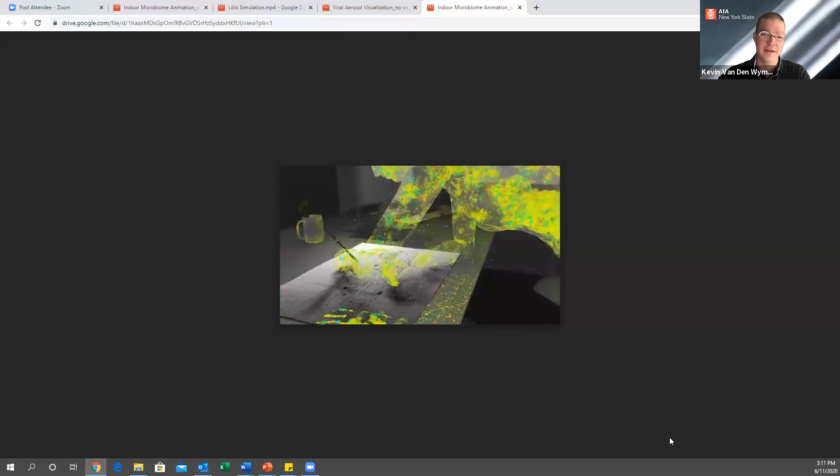We have microbial hitchhikers in our race for the sterile space, and we've lost some diversity in our human exposure as we disconnect from outdoor ecosystems. Buildings house trillions of microorganisms interacting with each other and with humans. Understanding the indoor microbiome opens a design opportunity to support human health in really unprecedented ways. And we knew that before COVID-19, and it's now in everybody's worldview and understanding.

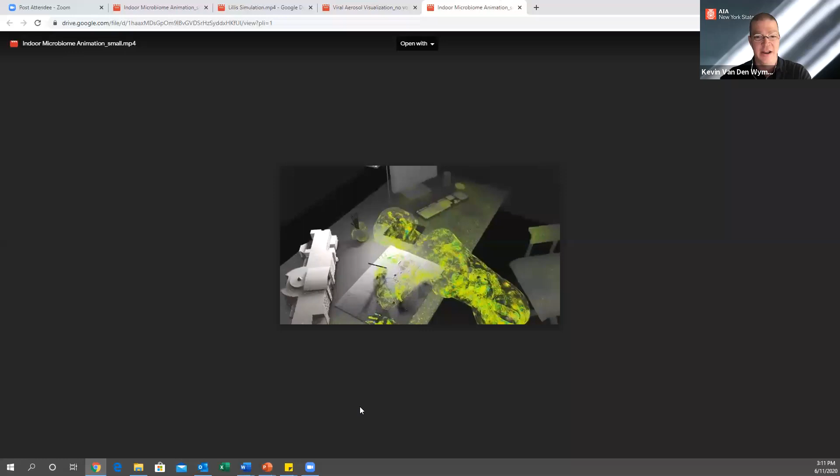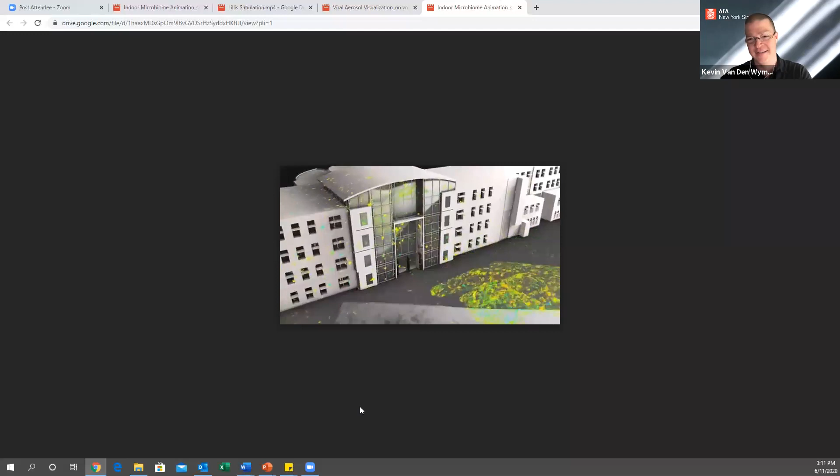We've learned how building design and operations and human behavior shapes the indoor microbiome. And as Churchill said, something like, we shape our building microbiomes and thereafter they shape us. I think that's what he said. We know that exposure to sunlight, access to fresh air through operable windows, and material choices all impact the indoor microbial landscape, and human exposure to both beneficial as well as potentially pathogenic microbes.

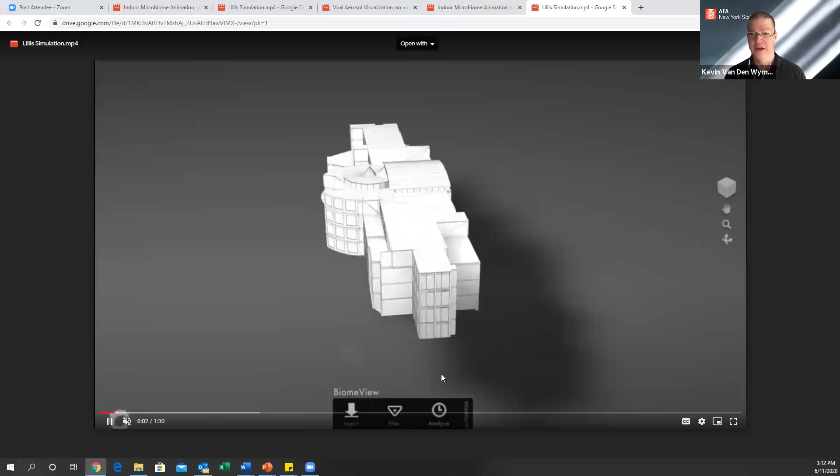Next slide. In 2011, we took this idea of studying indoor microbiology to the Lillis Business Complex, and we were interested in this building for several reasons. There's a diversity of space types and activities that occur in this building, but also our energy lab. This was before I joined University of Oregon, but our energy lab had done consultation on this to try to reduce climate impact.

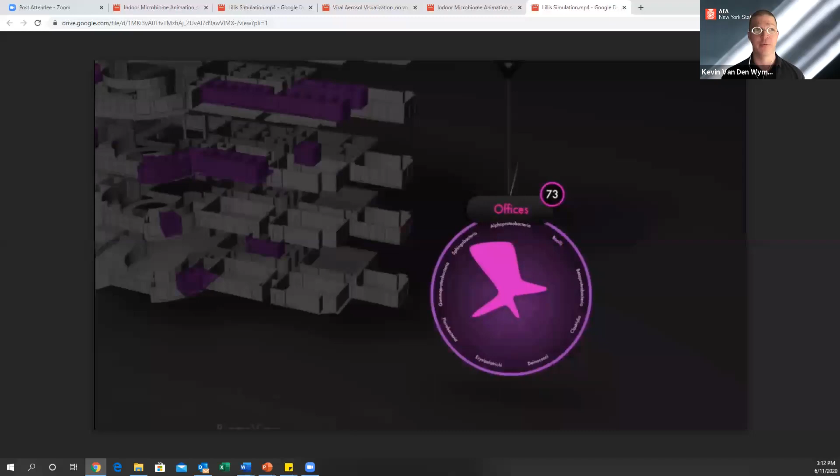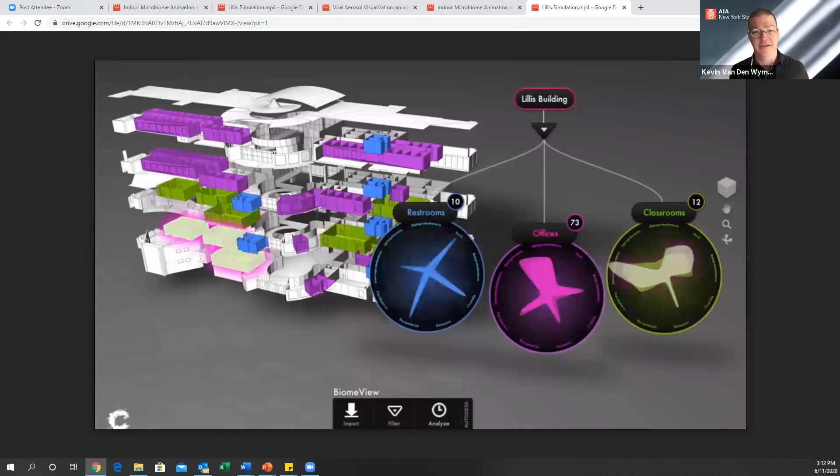And you know, for 2001, when this was constructed, it achieved an EUI of less than 40 for a large higher ed building. That was pretty exciting. But here we find the synergy between health and energy, coming back to study this building and some of those energy efficiency strategies with regards to the indoor microbial ecology.

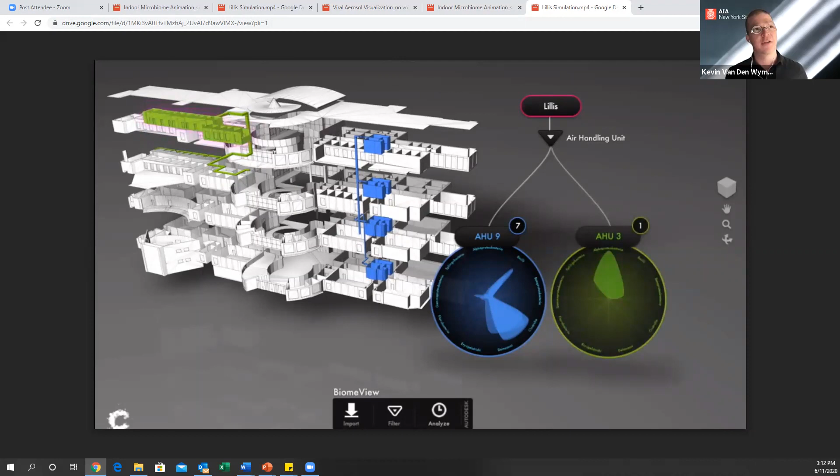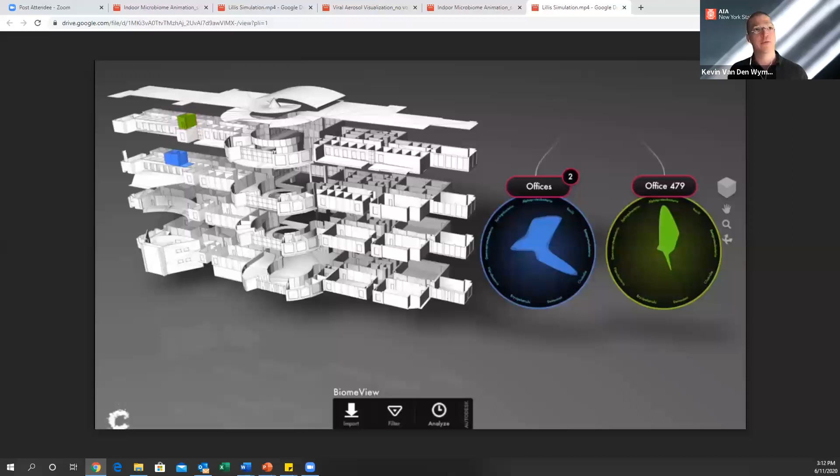So you can see that these plots are actually kind of phylogenetic tree plots showing different indoor microbial structures with different room types and different air handlers, and some of that predicated by the activity. Here you can see different offices on different air handlers have different microbial signatures.

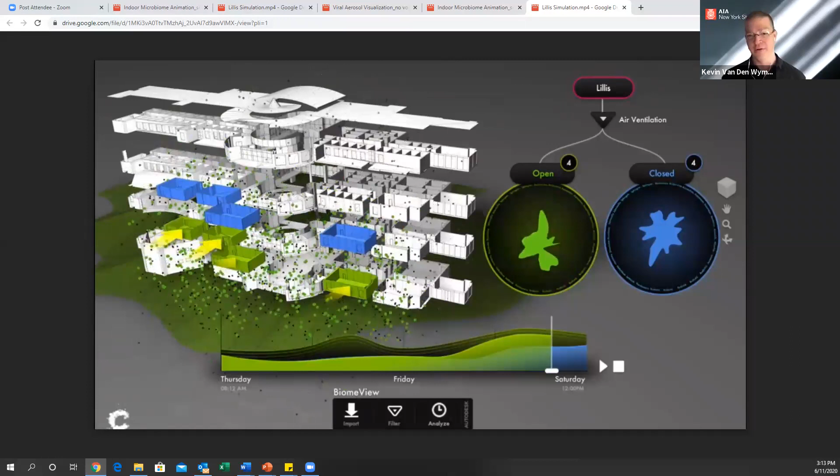And what you're seeing here is a microcosm kind of study where we did 3 days of operation, where we had some rooms that were mechanically ventilated and some rooms that were passively ventilated with the natural ventilation and night flush cooling strategy. And really what we were able to determine is that there was a reduced abundance of potential pathogens in the spaces that had natural ventilation.

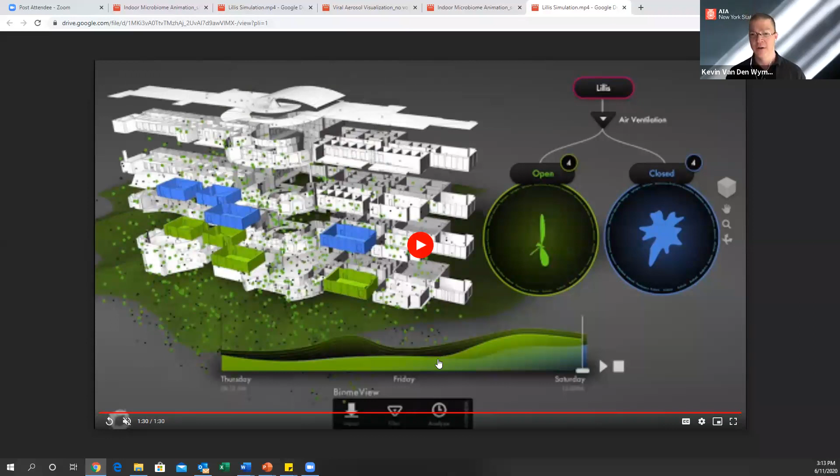We don't know the mechanistic explanation precisely, but it could have to do with the solution to pollution is dilution, or it could have to do with the lack of filtration and intentionally introducing a more diverse microbial ecosystem from the outdoors. Next slide.

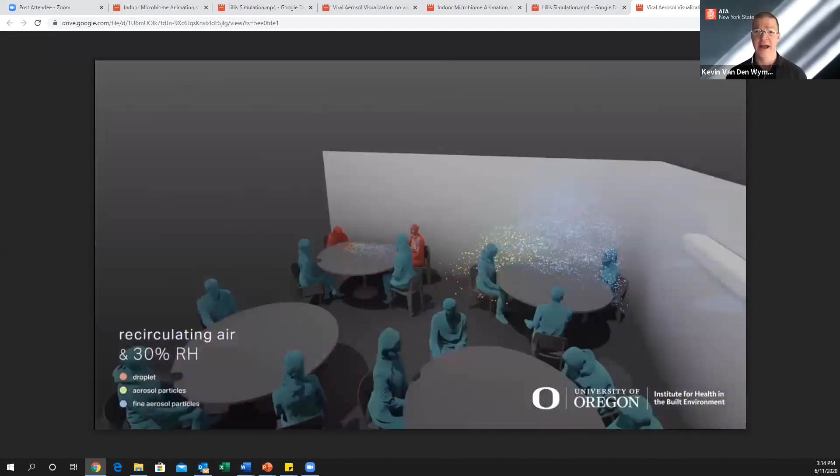So when coronavirus became really urgent here in the United States, we took this microbiology knowledge from the last decade and we applied it to what was emerging rapidly in terms of this virus. And in particular, we put together this visualization, which ended up getting a lot of traction. CBS This Morning and BBC World News picked it up. And really it was just explaining a very simple phenomenon.

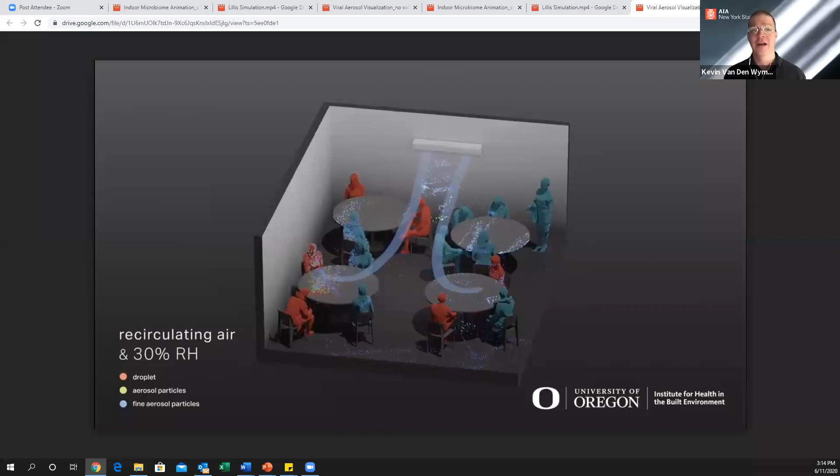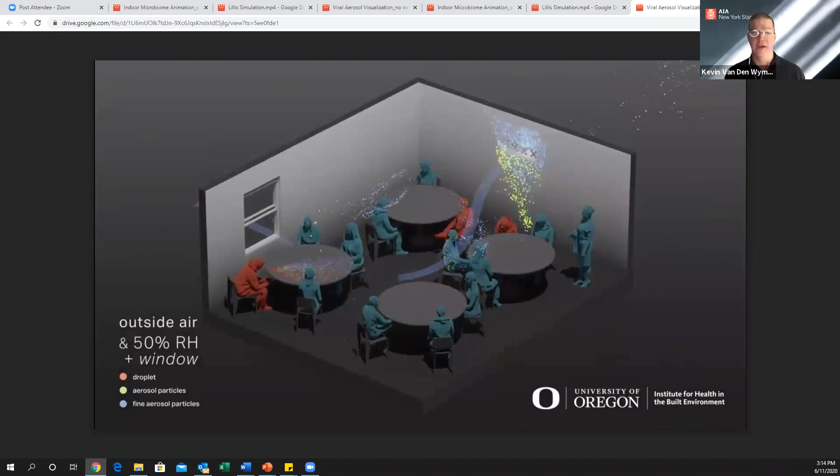And for those in the architectural world, this was probably fairly intuitive. But for the general public, people had a hard time understanding the mixed messages around aerosolization and airborne transmission and the magic 6-foot circles. And so really what we tried to do here is just show how architectural design in conjunction with building operation really can make a difference for this virus as well as for other pathogens and, more broadly, in support of human health.

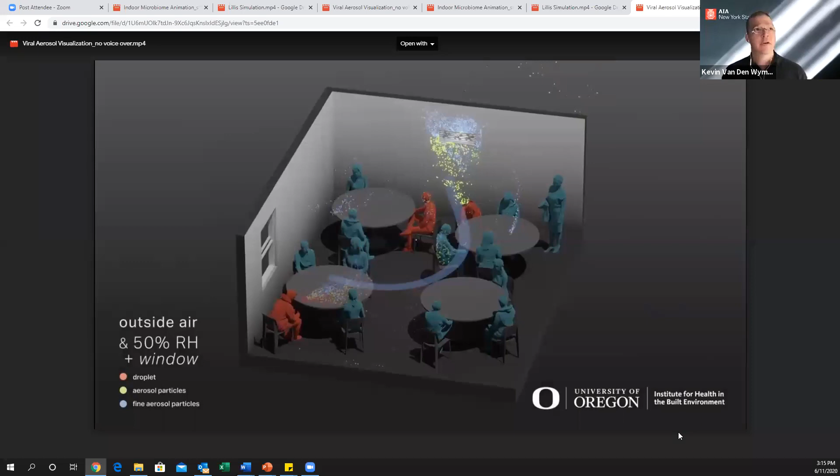So the next slide will show what we did in collaboration with Oregon Health and Science University. And I have to take my hat off to OHSU and their leadership team for accepting this really important responsibility to show leadership in the space of healthcare engineering and practices to promote safer healthcare environments.

But really, this phenomenal opportunity is also generalizable to other building types, because if we can sample the spread, the fate and transport, if you will, or the spread and dispersal of coronavirus in hospital settings, there's a lot that we can learn about what's applicable to other building types.

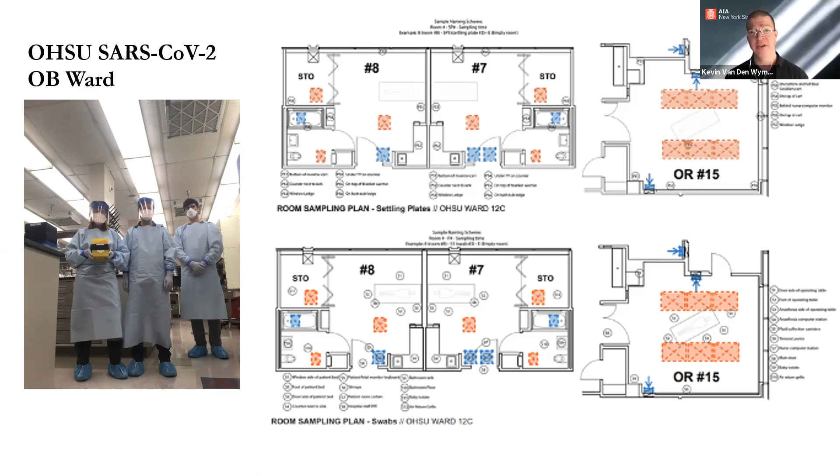Next slide. So you can see we sampled multiple locations in multiple rooms, including patient rooms and the OR. And this first image here is of one of the patient rooms. And again, I just want to thank OHSU for allowing me to share this publicly. This is vulnerable information in many ways, but I've been so impressed with their springing into action as we got these data 2 months ago now. And they've been enacting new operational practices in real time with this feedback.

So what we see here on the graph is a map of where we sampled in the physical environment in a hospital room. The blue box with the red dot is an example of a location within that room that was sampled positive for the RNA. Now, that doesn't necessarily mean that that was viable RNA and therefore infective, but still tracing RNA from SARS-CoV-2 or coronavirus in the hospital helps us understand a lot about potential transmission risks.

Well, that blue box is the return air grill. And so that was my first clue that indeed coronavirus RNA is getting picked up into the airstreams and sucked into the exhaust stream of the hospital. The other red dot is the surface on the floor in the bathroom, which gave me clues about potential aerosolization events from toilet flushing. The other thing I want to add is this room had been empty and clean without a COVID positive patient in it for over 10 days.

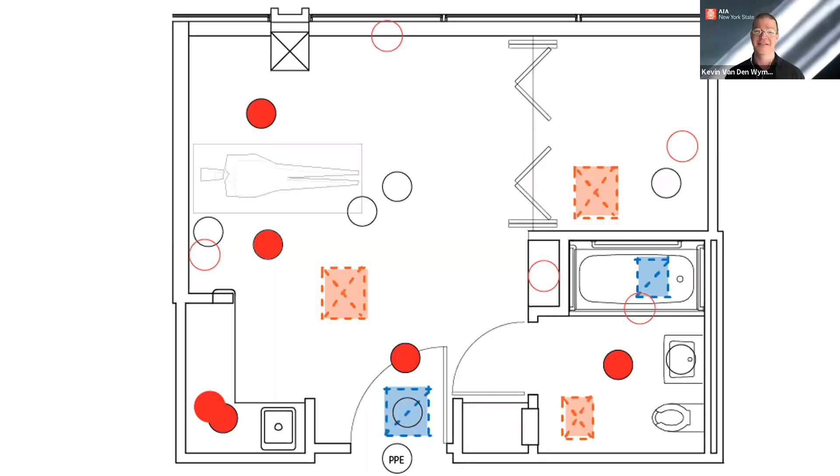And then finally, the third slide, oh, I'm sorry, I think maybe I forgot to say slides. So here, this is the second patient room, the negative pressure room. And then the next room is the operating room. And of course, the operating rooms in hospitals have the highest air change rate, highest filtration, et cetera. And the red dot in the corner was the only positive sample, which is really encouraging in many regards, because of course we want to keep the patient as safe as possible.

But it also tells us a lot about where eddies and airflows really do implicate the potential fate and transport of this virus. That was a passive air settling dish, again, on the same day, which means there hadn't been a positive patient in the ward for 10 days and no positive patient had ever been in that room. So this gives us a clue that it's either floating around in aerosols or potentially being moved around on surfaces that move in and out of these rooms.

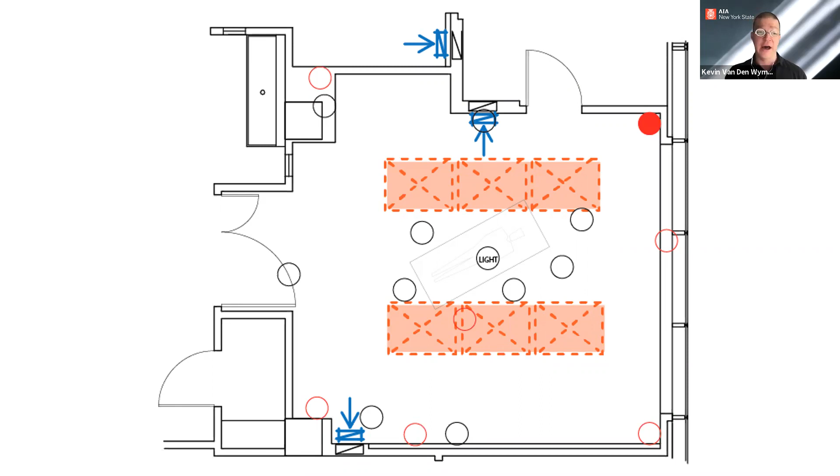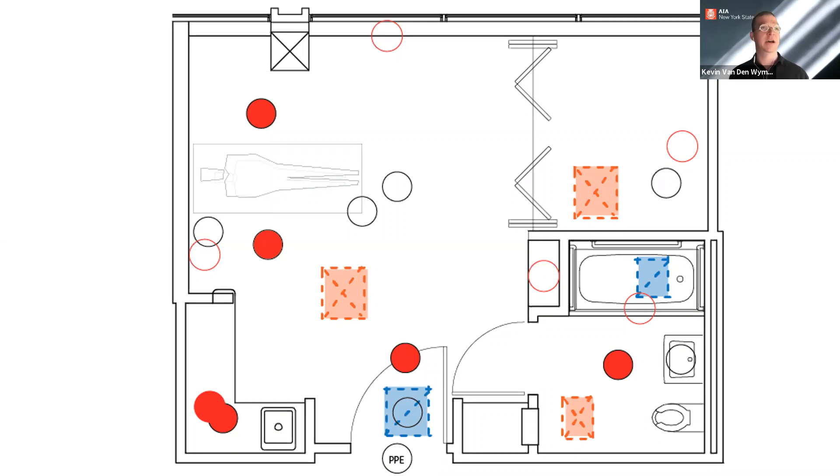Next slide. Hey, Kevin, could you go back one slide? I'm sorry to interrupt you. There were two people on the chat that really wanted to see your middle slide just for a moment. Oh, yeah, sure. So this one is the negative pressure room where we saw more locations that were positive. If you really want to dig in, the black circles are swab areas, where we took a surface swab, and the red circles without the solid fill are passive settling dishes. That's where the dust is just settling into a petri dish. So you can see, for example, in the bottom left corner, we swabbed the counter, it was positive, and we put a passive settling dish on the counter, and it was also positive.

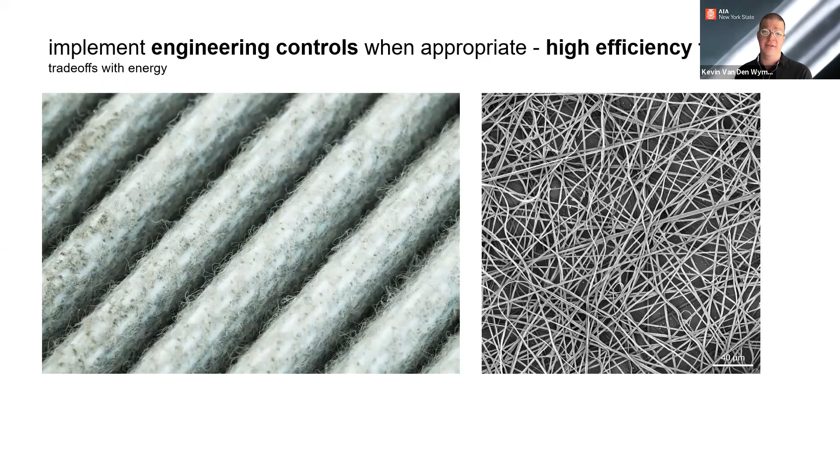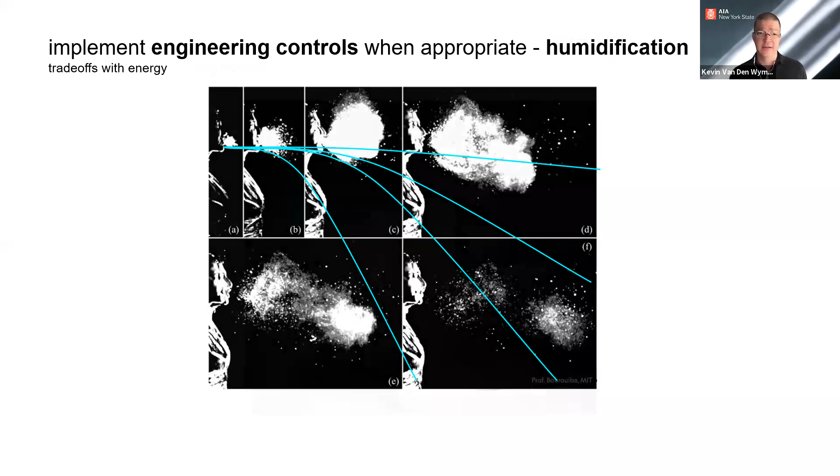There are multiple layers, and we need to think both about engineering controls like increased filtration, as well as opportunities to enhance and support human immune function. Both of those hats are important. Thank you. Humidification is another concept because it has to do with particle deposition rate, as well as human immune function, and there's even evidence to show that mid-range humidity can more quickly erode the lipid shell of the virus and inactivate the virus. Next. And then of course we have targeted strategies like UVC irradiation or UVGI, germicidal irradiation.

There's more and more research being done on that in terms of how long does a room need to be exposed? What's 254 nanometers versus 222 nanometers, and what does that do to the virus versus the human?

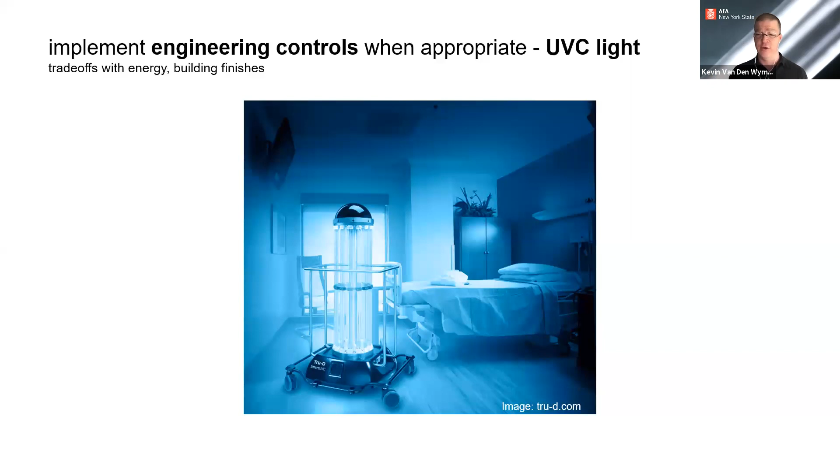Next slide. Thinking about this notion where you have to have buildings that can be flexible to increase outside air exchange rate during a viral pandemic when you have an indoor source of contamination like a COVID positive occupant, or in cases where wildfire smoke or outdoor pollution is such that you need to do enhanced filtration and do more recirculation. And the scary thing is there are times when both of those are a reality. And so our buildings need to be flexible and dynamic to that. Next slide.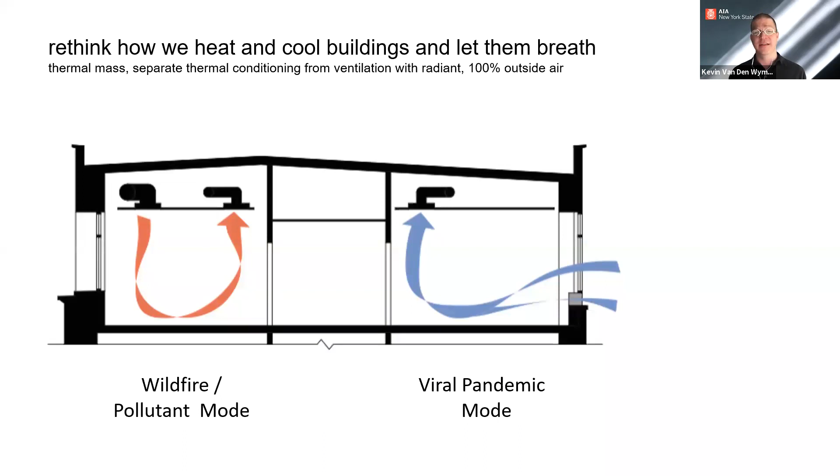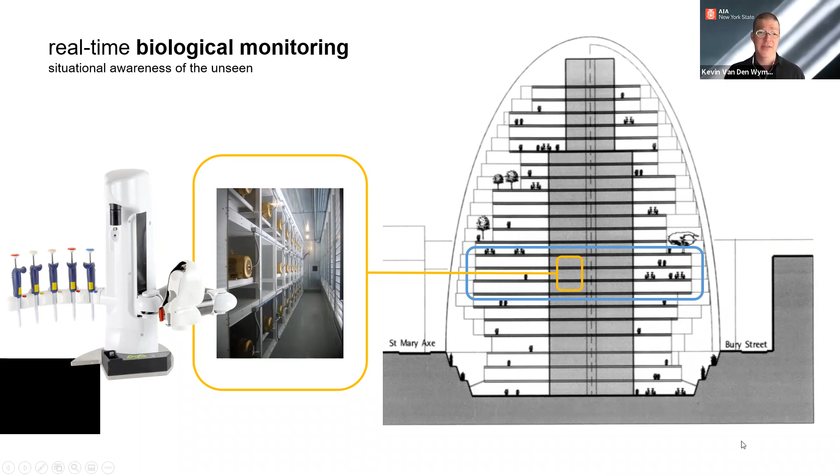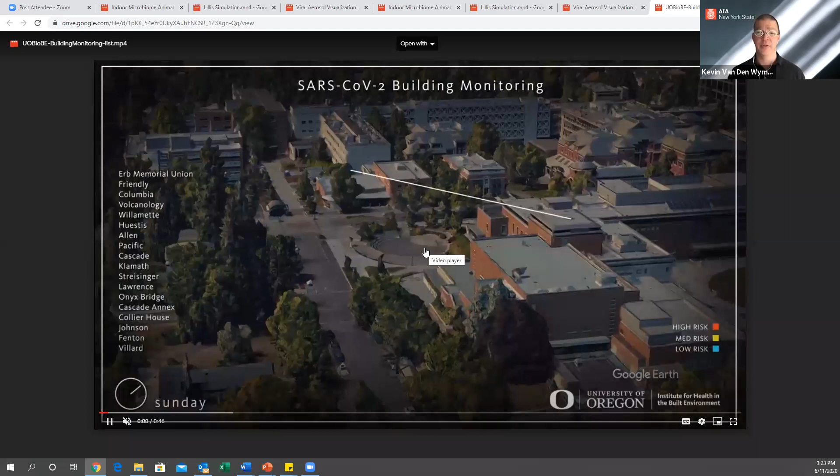We're working on concepts for real-time biological monitoring in indoor environments. We're at early stages, and I'd say that's a technology that I hope we can see come to reality in the next 6 months. Next slide. And then we're also working on solutions to more rapidly detect viruses in buildings just using our current manual methods.

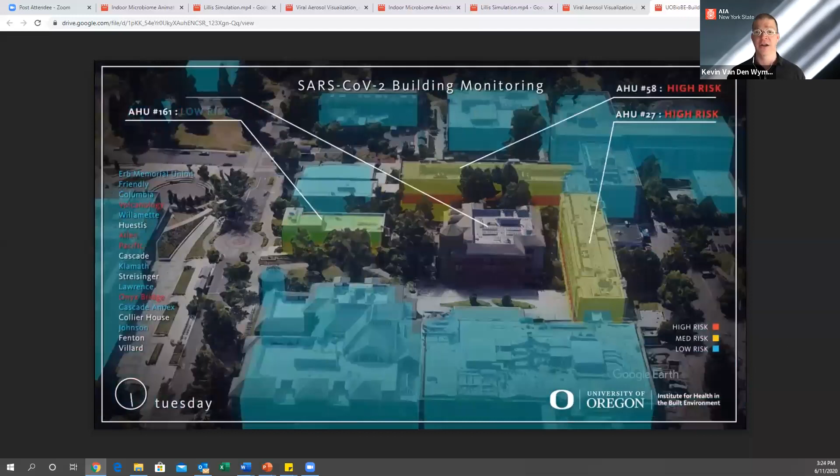And so we've been working with university leadership to sample buildings at OHSU, and we're beginning the launch at University of Oregon as well, where we'll have this opportunity to get a near real time, like a day-by-day situational awareness of what the transmission risk might be.

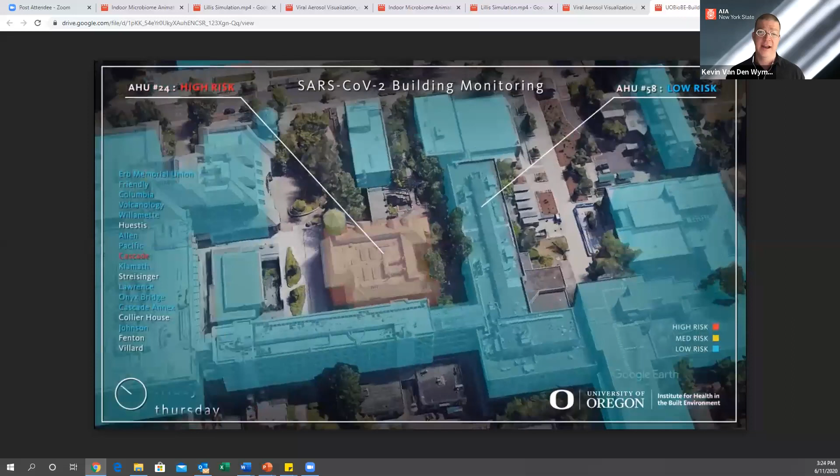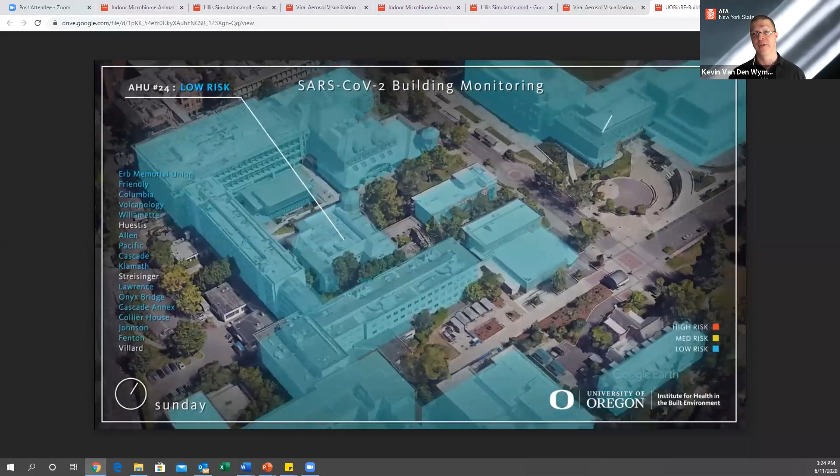And I think this is hugely valuable because, for example, the South Korean call center had several days where people were infected in that building before the big spike occurred, as many as 7 to 10 days later. So if we could be detecting risk on a day-to-day basis, I think there's a lot we could use to make actionable improvements. Next slide.

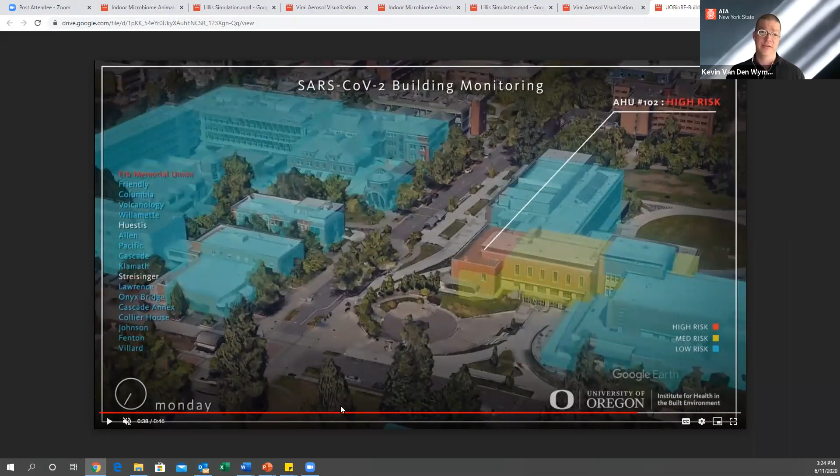This is just to show that we're trying to scale this up and share this with other universities. I've had some conversations with Nick Ratkovic, who was mentioned earlier, about potentially doing this work in collaboration through a mail-in system where samples can be collected and shipped to nearby labs for processing.

Thanks, Kevin. This is our second word, bacteria. And that'll cue up Dr. Molly Scanlon. Good afternoon, everyone. Thank you for having me. I'm going to be talking to you about 3 different areas. Next slide.

So I actually have 3 different positions here, just to clarify, because I'll be going over 3 different areas. I do work in industry for a firm called Phigenics. We are a water safety, water quality firm that deals with waterborne pathogens, primarily in the United States and Canada, and have building owners across all building sectors.

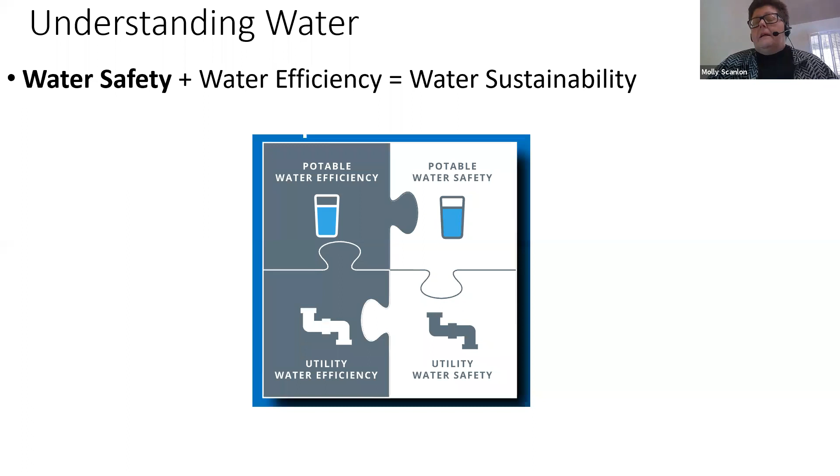I spend a lot of time in the United States on doing LEED buildings for water efficiency because they are harming people. So it isn't just LEED, it's just that the practitioners, people are so dependent that water coming out of the faucet is safe, they believe that, and it is not true in all cases. Next slide, please.

So with COVID-19, with the SARS-CoV-2, there's a comorbidity challenge. This comorbidity is when there are two disease situations occurring in the human body. And so you've heard a lot about immunosuppression. So a COVID-19 patient, the ones at highest risk have an underlying disease or a complex condition: hypertension, diabetes, coronary heart disease. I happen to have restricted airways in my lungs from inhalation of secondhand smoke because my parents smoked in the 1970s and 80s. So I'm someone that could have an increased risk, even though I appear totally healthy to other people.

These are some of the things that they found in some of the early research from China. They also found from Qingdao City that if you are a COVID-19 patient and you have had that and come across another situation while your body is still in a compromised state, you may have the flu, another flu, or there were 20% that were exposed to a waterborne pathogen and are deceased. And so when these things interact with each other in terms of disease structures, it can be lethal.

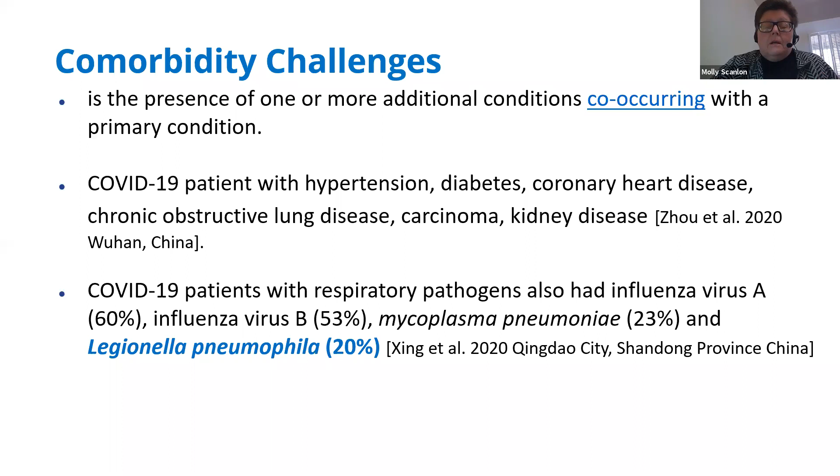Next slide, please. And go to the first bullet and next, bacteria. Go ahead and advance down through these and stop when it comes to the bottom.

Thank you. So there are many bacteria in our water. Legionella and Legionnaires' disease is commonly talked about because it's the only US reportable disease locally, state, and up to the national CDC. The rest of these bacteria exist in water, but they're not the poster child. They can be in any setting, but they infect and can create disease structures inside of immunocompromised patients. So we look at all of these various bacteria, protozoa. Fungi would be mold in water. You've heard about mold in building systems, I'm sure. Aspergillus and Fusarium can exist in water. They're more common in Europe than they are in the United States.

Under viruses, we typically have norovirus and hepatitis A, but we've listed the SARS-CoV-2. It can be in water. It's not in the supply water system at this time, as far as anybody knows. It's in the wastewater system. And so we have a safe water system right now, and that's very important during a pandemic. It's very important that we haven't had floods or tornadoes or something else yet to compromise our water system so that people can have confidence in using that water system during a pandemic.

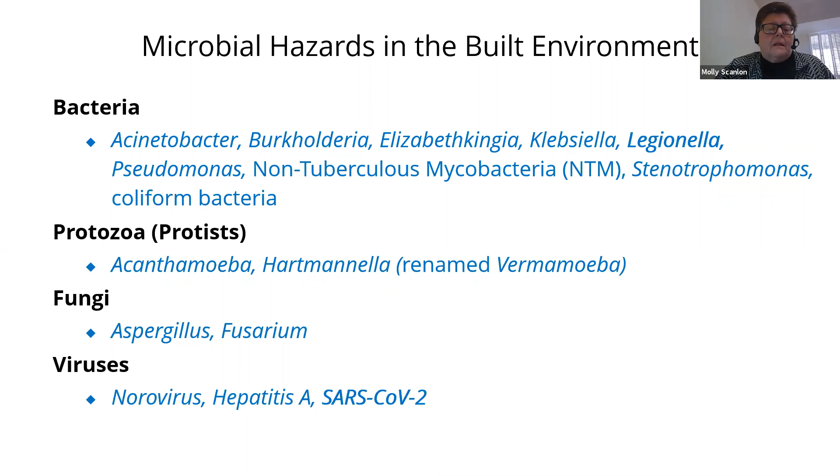Next slide, please. The other concern you can have is chemical hazards. So your water is safe up to the entry point from the US EPA up to the building edge. It is guaranteed to be safe. It is supposed to be free of lead and copper and other high chemicals and metals.

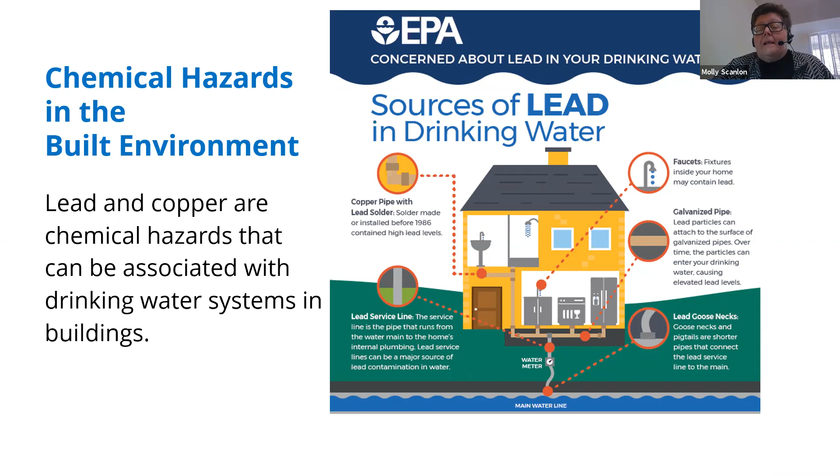However, what was brought to light during the Flint, Michigan situation was that service lines and older buildings may have water where, with the right combination of things going into the water system, or if what's called stagnated water occurs, these metals can leach into the water supply and end up in the fixtures. So when you go back into a building, all of these buildings that have been shut down have to be completely flushed and evacuated of the water that's been sitting there for weeks or months. Typically, if the building's been sitting more than 30 days, its water system should be recommissioned.

Next slide, please. So what I do on a daily basis is work with building owners across the United States, and I implement water policy from the CDC, the US EPA, the American Water Works Association, and any state Department of Health. At the end of the presentation, I did add one in for New York City. They have a guidance for returning building water systems to service after prolonged shutdown. Many states are taking an opinion on this. And if you are working on a team or with engineers where you're going to be modifying fixtures or the water supply, you should be checking these out.

So one of the biggest calls we're getting right now is from university campuses that have over 300, 500 buildings on them that have to be maintained or brought back into full use from low or no occupancy, and they have to purge all this water out of the system. So that's a very labor intensive process. And then there's testing, as Kevin's talking about. There would be environmental sampling to show that the water system is safe. Next slide, please.

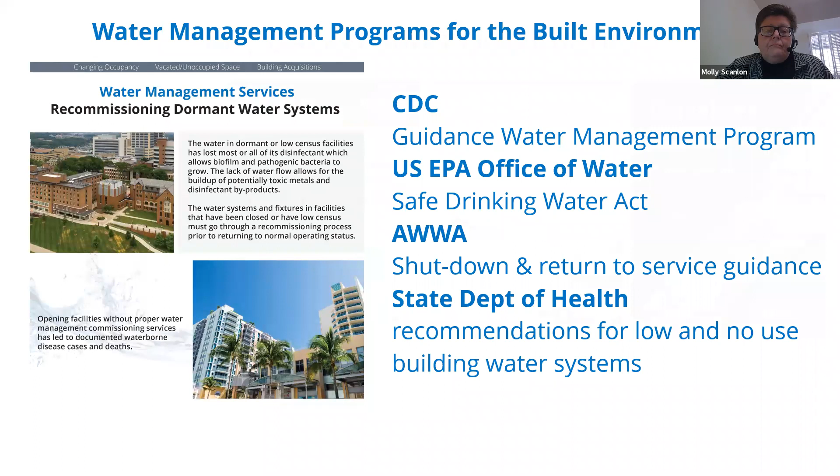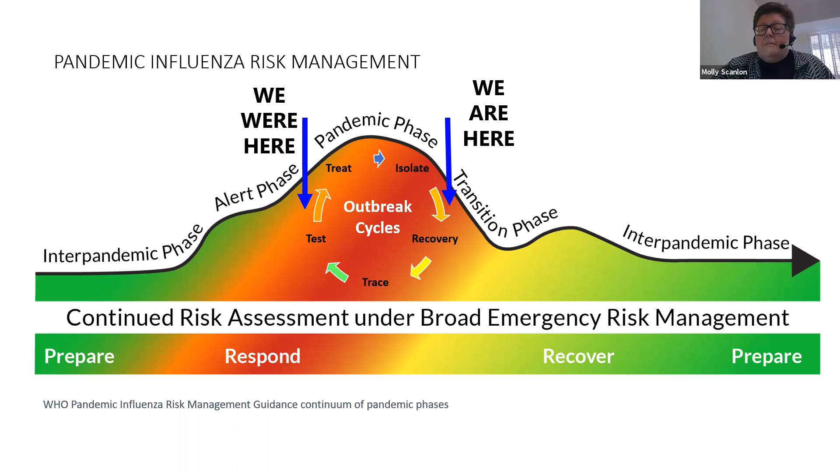Also in response, I have to click one more time if we need a title here, or maybe it didn't come over. No, go back. Must not have got the title over.

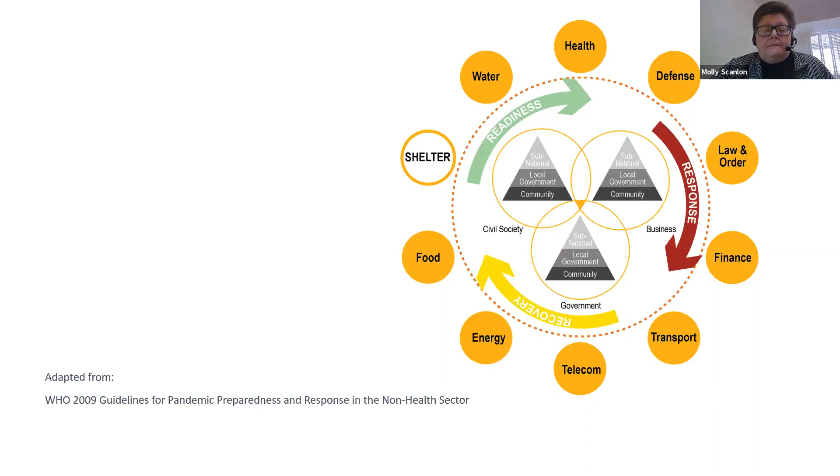So with that, the first task force I was on for the surge capacity, if you're interested in reading about some of those slides that you saw before and get more than this verbal explanation, there is a briefing document. It's relatively short, about how to create an alternative care site, how it fits into this pandemic response. And our task force 1 authored that. The second document was, I call it the PAT V2. It had a version 1 and a version 2. It's a preparedness assessment tool. It's a checklist of what to look for for surge capacity. So if, for instance, at the University of Arizona, they're thinking in bringing students back of setting up an infirmary, an organization like that may want to look at this preparedness assessment tool and see what is it going to take to have an infirmary on campus.

This document was validated by the US State Department, which picked this document up and has distributed it and deployed it worldwide to all US embassies. And it has been translated into 3 languages. It's available in English, Spanish, French, and Portuguese. They wanted to do that. The languages were selected first for the Southern Hemisphere, anticipating Brazil and Africa are coming up next.

The next tool that we did was the ArchMap. So if you're a healthcare architect and you had a COVID-19 experience with a client, you can go into the ArchMap and register your project. You don't have to register the building owner's name if there's a confidentiality issue, but you can put that up by state and you can help other people. We're recording this for historical sense, for research, and we're also just trying to be able to share examples across practitioners and across building owners. That's now going to be available also for those that are doing the Re-Occupancy. Next slide, please. So I was moved, and after the success of the first task force, we assembled a Re-Occupancy task force, and I was asked to just be a public health advisor.

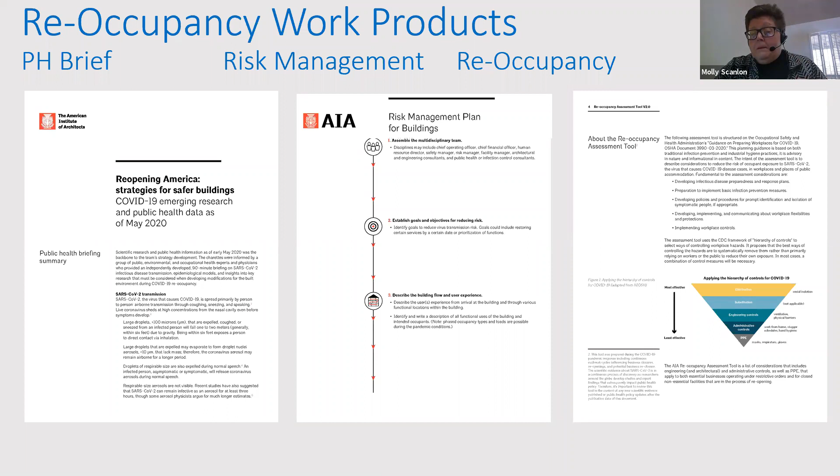The third document is the actual Re-Occupancy tool itself. It mimics what we did for the surge capacity as a checklist, but it goes down through architectural and engineering controls, it goes through administrative policies you might want to consider, and it goes through PPE that may want to be considered for the project. Next slide, please.

And again, the COVID-19 map is open, and you're supposed to be able to go in and pick different building types now that you're doing for the Re-Occupancy. Again, all of this is on the National AIA website. The COVID map was produced originally by the University of Kansas Health and Wellness and the College of Architecture with Frank Zilm and his team, and they stepped up and used a Power BI, so you can go down and pull down the building type and what you want to see.

And this is now the 5th largest hit on the national website to be looking at. So these are tools that the AIA wanted to put out to its membership so that they know that this is here and to help practitioners nationwide and worldwide.

Next slide, please. So I'm going to spend a few minutes giving you a mini lesson on some words you've heard today about hazard analysis and environmental controls and how that fits into risk management. And there's more of this, again, if you choose to use the AIA's website. So remember, this is the most common mistake by anyone who's involved in this, not just design professionals. A hazard is not a risk. A hazard is something that needs to be controlled. It is a thing. Risk is an evaluation.

So if I'm driving my car down the street and there's a drunk driver next to me, somebody may decide that they want to continue driving on that same road and other people may not. That's a risk decision, and everyone will make a different decision. But the hazard itself is a physical drunk driver. The risk is whether anyone's going to continue to drive on the same road as the drunk driver, if that helps. So risk is a calculation of probability and severity. The more drunk the driver, the more severe the accident might be, right? So let's move on to something for the built environment.

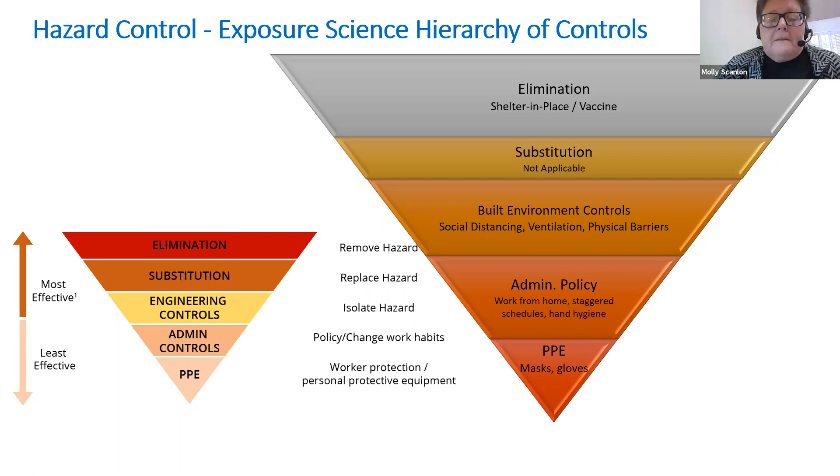Next slide, please. So what I did was, for the AIA, we took this risk management, I call it BERM, Built Environment Risk Management Program, and put it into a 7-step process that is used under HACCP for food and water and all these other risk management programs. And you can see the hierarchy of controls that I'm talking about is actually step 5 in the process.

Analyzing the hazards, primary for us in this case is SARS-CoV-2, but we could have secondary hazards. If these buildings are modified and doors are removed, you could have life safety hazards, trip hazards, weather hazards, Legionella, bacteria, lead, copper, all these secondary hazards that could come into play. And how is everyone going to actually respond to that? But the problem I find is most people focus on box 4 and 5, and they forget the other steps of the risk management process.

What we tried to do at the AIA was emphasize these built environmental controls in the Re-Occupancy toolkit that you can download. And we want you to use that toolkit, use the ArchMap, and work with your clients through the risk management process to try to bring an interdisciplinary team so that you're not making decisions in a vacuum.

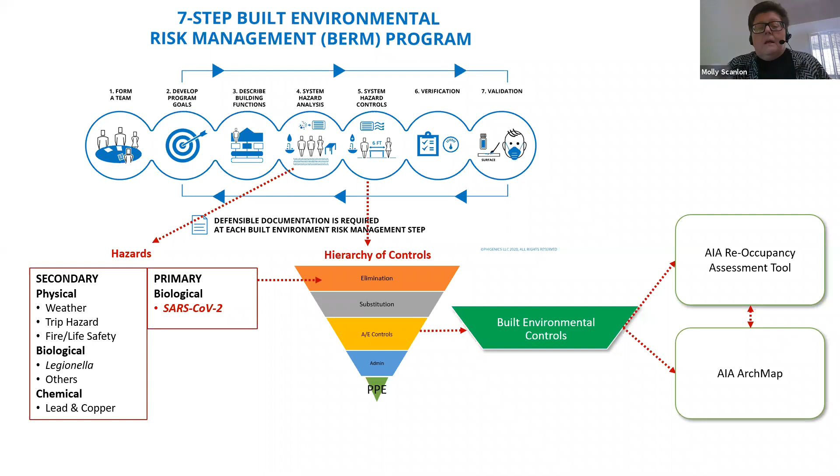Next slide, please. So I'm going to wrap up. This is something a little bit more technical, and it takes a lot more explanation. So I'm just going to quickly go through the 7 steps of risk management. You form an interdisciplinary team that, in my opinion, should include a licensed professional from the built environment, including architects and engineers and maybe contractors. That team, along with the building owner and maybe health professionals, need to develop program goals.

Set when is the building opening? Who are we going to be occupying in the first phase? Who are we going to be bringing back in the second phase? Then the 3rd step is to define that building and its functions. Where are people going to flow to? What's going to be open or closed potentially? Define the hazards, which we've talked a lot about, Dr. Kevin and myself, and then define the controls.

But the thing that Dr. Kevin talked about that was so important is you must be able to verify the hazards that you have analyzed and the controls that you have put in. So if you do all this 6-foot distancing of tables in a restaurant, who's going to put them back in position at the end of the day? Who's going to be responsible for that? That has to be verified every single day and throughout the day of operations.

And the last step is you must do environmental sampling and human sampling. So if you put all these controls in and there's continual outbreaks in this space, what is the point? You must verify and validate the risk management process. Otherwise, you won't know how to adjust the controls to keep making them work and fine-tuning them throughout the process.

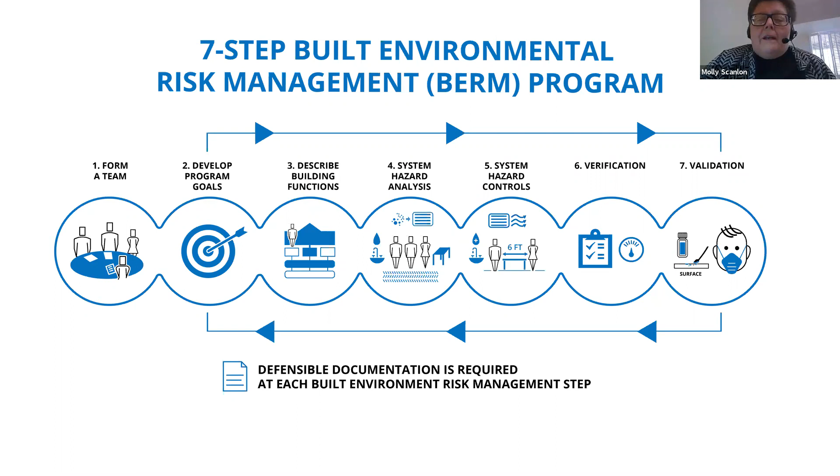I've been asked to participate in this panel to give some practical advice for architects, design professionals based on the science that Molly and Kevin have presented us with, which was fabulous. So now we've been given tools as well as scientific information, and how is this going to impact the architect's day-to-day practice? So these are some topics I will touch upon in my portion of the presentation, which are practical considerations and applications for design professionals. These are some of the practical considerations architects should be aware of, but certainly not all.

And I'll go through each of these items in a little bit more detail. Next slide, thank you. So the first task for us all is to assemble the right project team. And we all should be realizing by this time that we've been faced with a different issue that becomes part of the design process for all of us, whether it's sustainable issues, acoustical issues, any kind of energy issues. Now we have health care and specific issues addressing the pandemic and how it's affected our built environment and the people that inhabit it.

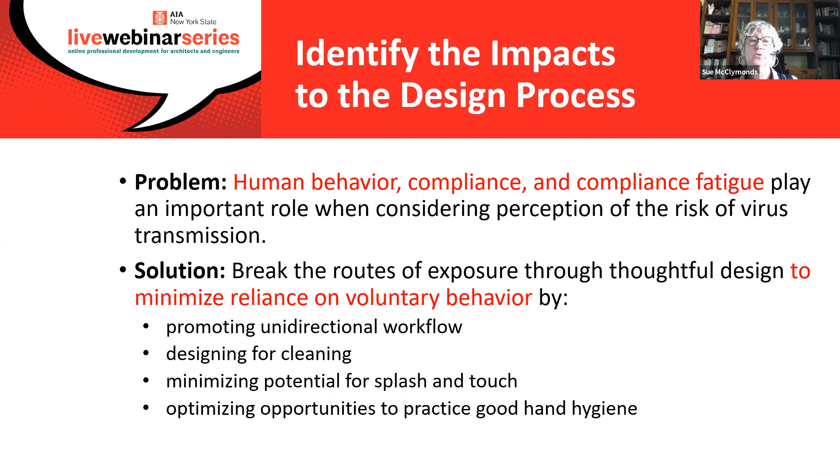So the solution would be to break the routes of exposure through thoughtful design to minimize the reliance on voluntary behavior. And we see this happening now, promoting unidirectional workflow, designing for cleaning, minimizing potential for splash and touch, and optimizing opportunities to practice good hand hygiene. Next slide, please.

Okay, I'm going to talk about a couple of topics in material selection considerations. As a specifier, I think about this quite a lot. And so I'd like to share some of this stuff with you. And so for the next several slides, you'll see some sources where I've taken information from. These are also included at the end of our presentation with links to the internet where you can find this information. So there's been published research, and that's the source at the bottom of this slide, that shows that the virus is more stable on smooth surfaces like plastic, glass, and stainless, and less stable on paper and copper. And the longest survival times are on stainless steel and plastic, which are quite a lot of materials in our built environment.

So the design strategy for us should be to reduce the possibility of the virus transmission from frequently touched surfaces. So the solution would be to specify touchless fixtures and appliances to eliminate touch points. And these would be doors and door hardware, automatic openers, elevator buttons to be voice activated, for example. Drinking fountains could be eliminated, and we could put in automatic bottle fillers. And then, of course, faucet handles, toilet handles, soap dispensers, and hand dryers in the bathroom. Those are pretty common materials that we're all kind of aware of that are being used now, but for different reasons, for energy saving or product safety or saving cost. Okay, next slide, please.

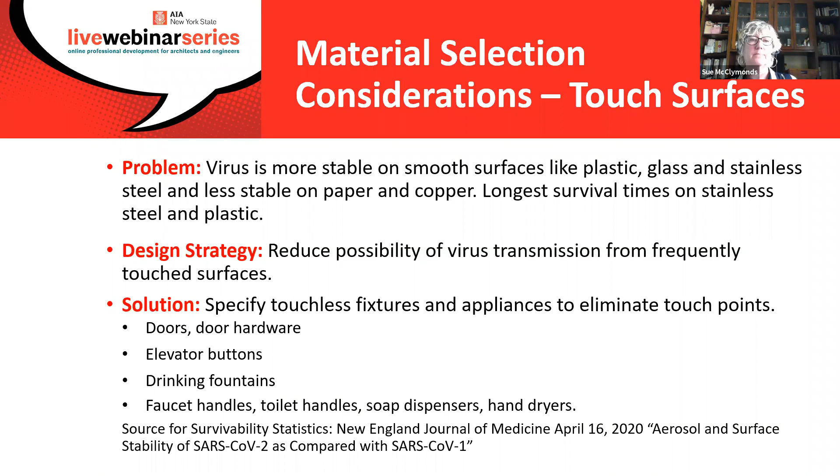Let's talk about antimicrobial treatments. I, as a specifier, get all kinds of articles sent to me about COVID-19, use our antimicrobial doorknobs or levers. I would like to just let you all be aware of the fact that products that are considered furniture or an interior finish, including countertops and paints and hardware, may be coated or manufactured with one or more combination of antimicrobial agents. However, to date, there's no evidence demonstrating that products intended for use in the interior spaces that use these materials actually result in healthier populations.

And further, antimicrobials may have negative impacts on people and the environment. The widespread use of antimicrobials may be associated with microbial resistance to these agents and potentially to therapeutic antibiotics. And evidence is growing that antimicrobial additives can migrate from the products into the environment with unknown ecological implications, but with reasonable cause for concern. So next slide, please.

And then of the utmost importance, the health claims made about the use of antimicrobial treatments to building materials and finishes can create a false sense of security that may cause building managers to be less diligent with cleaning and disinfecting protocols. They think something else is going to take care of it. They won't clean as thoroughly.

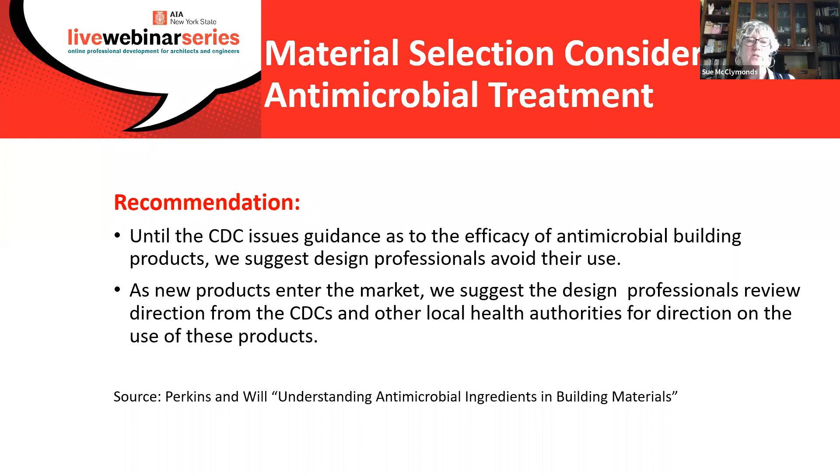So these are recommendations from the white paper at the source at the bottom of the slide. Until the CDC issues guidance as to the efficacy of antimicrobial building products, this white paper suggested design professionals avoid their use. And further, as new products enter the market, this white paper suggested the design professionals review direction from the CDC and other local health authorities for direction on the use of these products. Okay, next slide.

Impacts to building system design. This is addressing some of the science that Kevin presented. The ASHRAE white paper that's noted at the bottom of the page has specific design strategies relating to HVAC in medical and non-medical use buildings. It's a good document. And Kevin went over these with nice graphics, and mine are just words, but they have the same meaning.

So the problem is the airborne transmission of SARS-CoV-2 is sufficiently likely, as Kevin has told us, and operation of the HVAC system can reduce airborne exposures. Operation of HVAC can reduce the airborne concentration of SARS-CoV-2 and thus the risk of transmission.

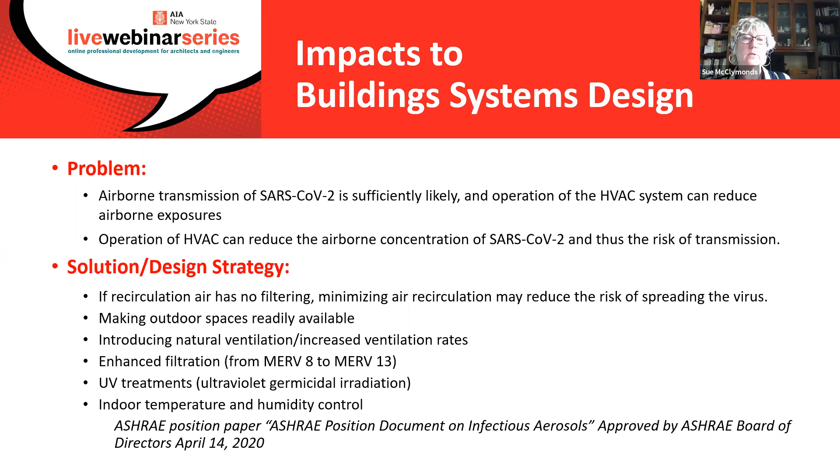So here are a few solution and design strategies, and you can read them. Enhanced filtration: they recommend filters from a MERV 8 to an upgraded MERV 13. UV treatments, as Kevin had mentioned. Indoor temperature and humidity controls, which he went over. And making outdoor spaces readily available for use. All right, next page.

Okay, so here's an example, just a snippet from that EPA website. There's a lot of information there. If you're thinking of trying to kill the human coronavirus, you can pick from this Lysol brand all-purpose cleaner. In 2 minutes of contact time on hard non-porous surfaces, in healthcare, institutional and residential settings, it killed the virus.

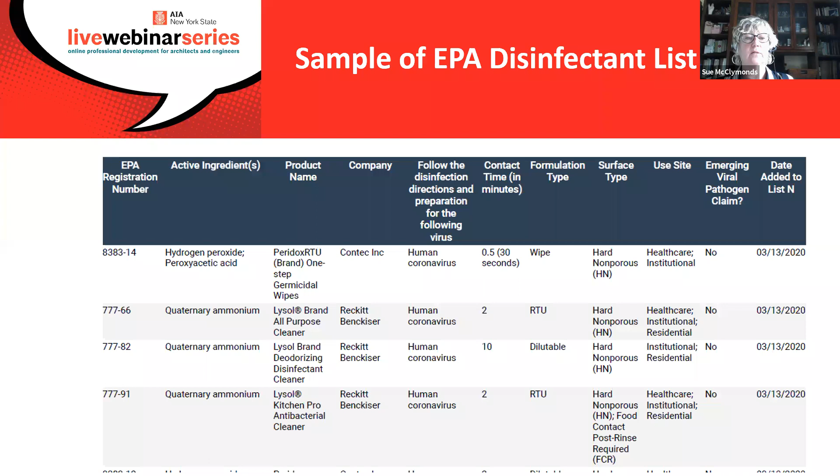So this is a resource that you can all use if your owners are asking. Yeah, so these are readily available. You can look on the EPA website for the list of disinfectants. Next slide. Okay.

So this is a new emerging concern for all of us. And we need to take the charge of protecting the health, safety, and welfare of the public as a most highly ranking concern for us. That's what we're licensed for. So now we have an opportunity to strengthen the knowledge that we have about person-to-person, air, water, surface, and fecal-oral transmission in order to consider effective design solutions.

And we can avail ourselves of continuing education seminars, specialized training, and I'm asking everyone to be aware of best practices, because best practices form the basis of our professional conduct. And it's very important that you are able to keep up with best practices.

And I would recommend that you familiarize yourself with the AIA Re-Occupancy Assessment Tool, which Molly went over, the latest version. It's on version 2 right now. It has many suggestions for best practices that you can incorporate in all new buildings as well as buildings that are being reoccupied. So next slide, please.

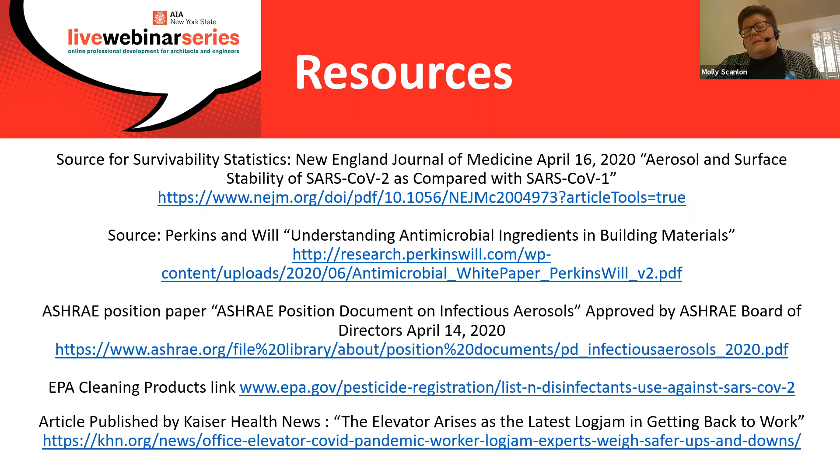So my hope in this, for those of you that really get excited about these topics: I was a traditional healthcare architect and I sunset my practice and I went back to get a doctorate in public health. I'm an environmental health scientist.

And instead of going and getting a master's in business administration, which people used to tell me when I became an architect, because architects were horrible business people, if those of you would like to be involved in public health, go get a certificate in public health. Sign up to get a master's in public health if you're young enough and want to do something like that. Go back and get a doctorate in public health, and you will be on the forefront of being able to develop these kind of solutions with the science in the built environment.

So I'm making a call on all architects. I seem to be one of the few environmental health scientists that had a lengthy architectural career that brought that together. But I'm making a call on all our architects, healthcare and other architects, to collaborate together, as well as I want you to step forward and look into public health as a potential allied discipline for you to work with and or educate yourself within. And you're going to be the best practitioner you ever thought you could be to respond to this now and to respond to this in the future.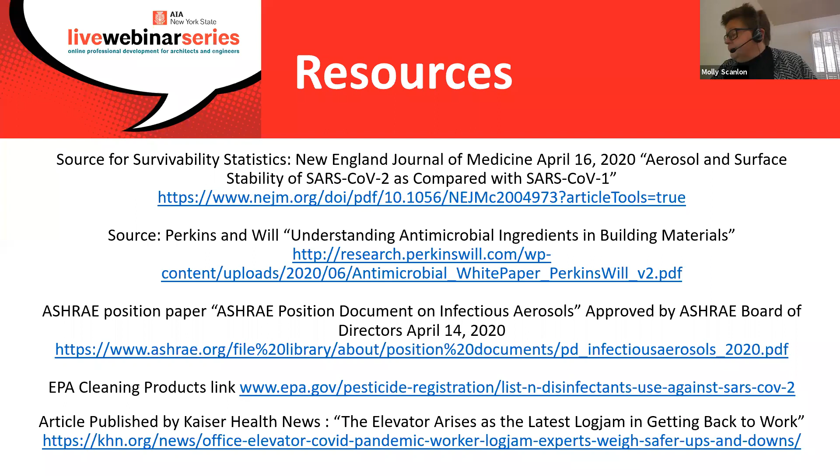Molly, that's really great, and I really appreciate your take that this is going to trigger positive change. I wholeheartedly agree with you. Every time we have a crisis, it drives positive change. Whether it was the Great Chicago Fire to you name it, it is a different challenge and it is a different hazard and it's a different response. But the positive change that could drive us to ways of working, habitual change, all of these things are amazing. So I appreciate that.

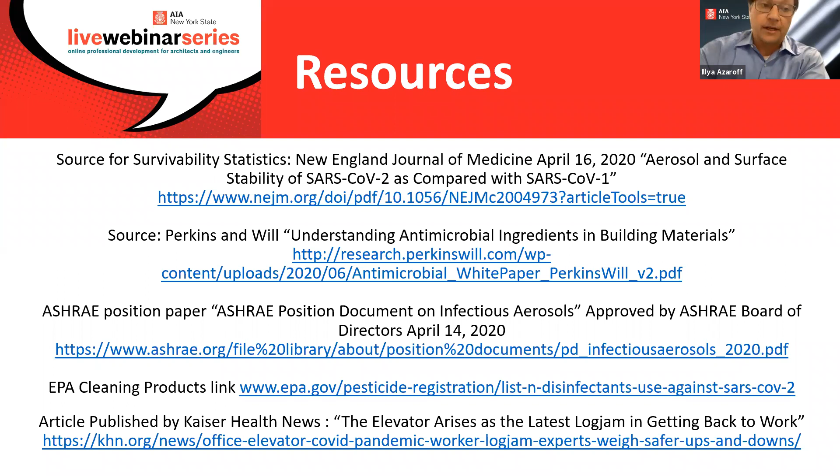Kevin, what is your take on this? There's a lot of questions on the chat for all of you, but Kevin, what is your take? Could you muse about where this takes us for the built environment?

Sure. I think a lot of what's been said is really well put and I won't repeat it, but I think there are some similarities, but there are also some differences to the previous influenza outbreak. I call this the 100-year flu, it seems. And the idea that there was a whole groundswell of kind of healthy building movement, access to light, access to air, that pandemic brought. And then various other pressures came in and memory faded, and energy kind of drove the narrative for innovation and design for most of my career until the last 5 years or so. And there's been this spark, this renewal for a focus on health in the built environment.

And I feel like this just puts it into laser focus, the role of buildings to support human health, not just health and productivity and the economy, right? So buildings are the engine of the economy. And I think it's a tremendous opportunity for this profession to show leadership in creating spaces that are supportive of human health broadly speaking, human immune function in a sort of long-term exposure perspective, but also flexible and dynamic to handle acute concerns like a viral pandemic. And I think what we're going to see are buildings that need to be incredibly dynamic and flexible.